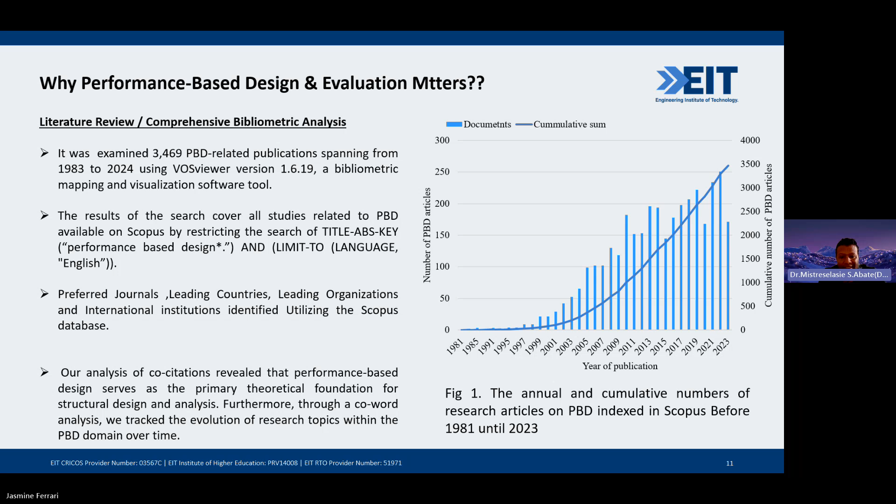In this research, the awareness of performance-based design is increasing, and we try to see which journal was publishing more in the PBD approach. Engineering Structures, and country-wise, the United States was the leading publisher. Co-occurrence and keyword analysis results were also checked, and the keyword 'performance-based design' was used most frequently.

So mostly in the literature review, we saw that in the context of seismic hazard assessment, engineering design, and comprehensive understanding of local geological and geophysical factors is very essential. Previous studies also lack crucial components such as local soil condition, ground response analysis, topography influence, active fault characteristics like slip rates, groundwater behavior, and slope consideration.

To ensure the accuracy of the seismic hazard map of a country for safe, cost-effective design of engineering structures in an urban area, detailed analysis is required. So the problem is because of lack of these elements, most countries' seismic hazard maps are not accurate.

So in general, from the literature review, there is one hypothesis—or not exactly a hypothesis, but an idea—about the challenge of adopting a seismic design code without necessary adjustment, accompanied by the absence of a reliable seismic map in a country without earthquake recording stations, which may lead to structural failure.

In such context, performance-based design emerges as a viable and crucial solution for ensuring structural integrity and safety for existing and newly constructed structures.

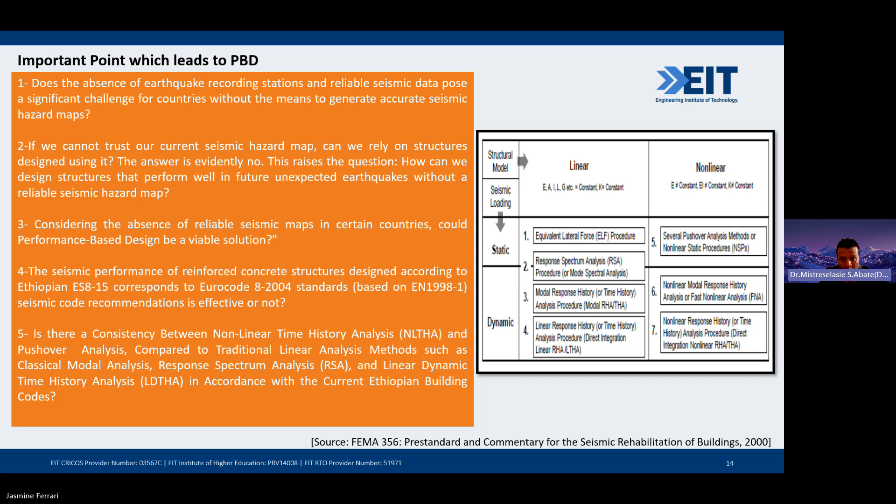Then after you compare, if for example the comparison of cross-section and area of reinforcement is equal, no problem, no need to go to the next step. But if it's not, then you have to go to the next step.

Then what we are going to do is design our response with the optimized nonlinear time history analysis result and pushover analysis. So we have to optimize the final local and global response found in the pushover and nonlinear time history analysis.

As I told you, from the PEER ground motion database we extracted 11 databases of past recorded earthquakes, for example Imperial Valley in the US, Landers in the US, Mammoth Lake. Imperial Valley happened in 1979, record station 164, magnitude 6.53, VS30 shear wave velocity 471, PGA value 0.1, and the mechanism was strike-slip, with spectral ordinate.

This was SRSS type. So as per the code, we need a minimum of 11 earthquakes for linear time history analysis, as well as nonlinear time history analysis and pushover analysis.

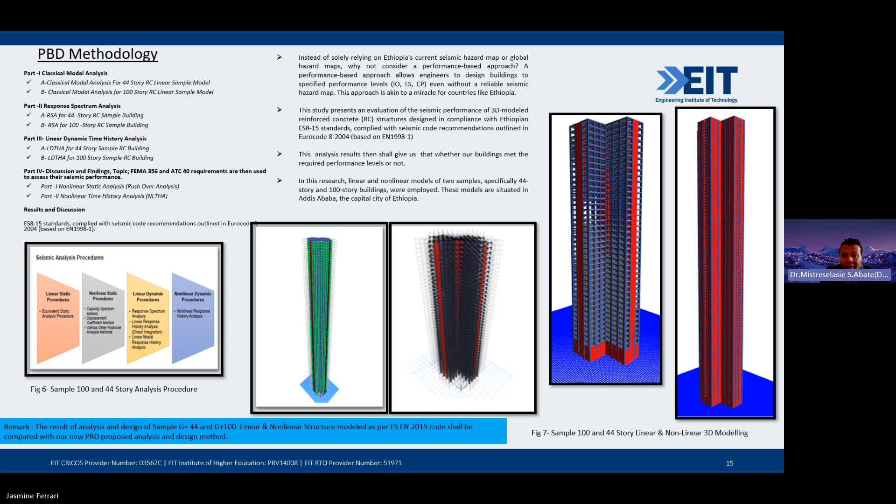So you have to do scaling and matching. For example, we can use two software tools: Seismomatch, and ETABS itself has the capability of matching your target response spectrum with the ground acceleration.

So you have to take care when you download these earthquakes. You cannot simply download an earthquake. You have to check the type of earthquake, the fault type, whether it's pulse type or something else. There is a lot of criteria, because the earthquake you are downloading should match your site conditions, and you have to use a technique called deaggregation. This deaggregation information will give you which earthquake contributes more to your fault. So you have to check in that area.

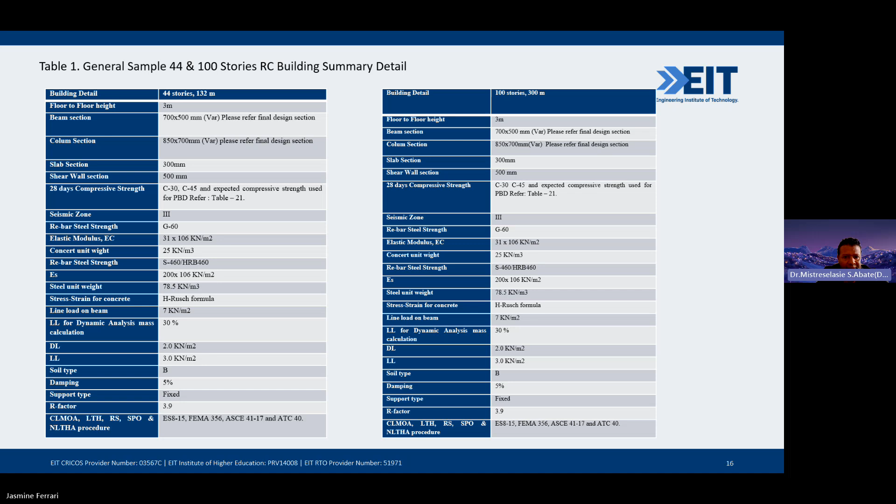Before the DBE level, we have the MCE level. So you cannot design at the MCE level. If you think your structure is like a linear analysis, it will be very costly. You cannot design with linear analysis.

So what the code recommends is that we take 2/3 of the MCE level, then we come to the DBE level, yeah? Then again at the DBE level, as you can see, we cannot design directly. So what the code recommends is we decrease from the DBE level to the design level using the R factor, as you can see.

This R factor accounts for ductility and the overstrength factor, because once you pass the yield point, the curve is not a straight line anymore. This increase is not because of ductility—it's also increasing because of the overstrength omega factor.

So as you can see, we use the omega factor again once we reduce the whole structure to its inelastic response using the R factor.

Then what we are doing is, for some building structures—for example girder beams and other elements—you want them to stay in the elastic range, yeah? So you have to increase them also using the omega factor, the overstrength factor.

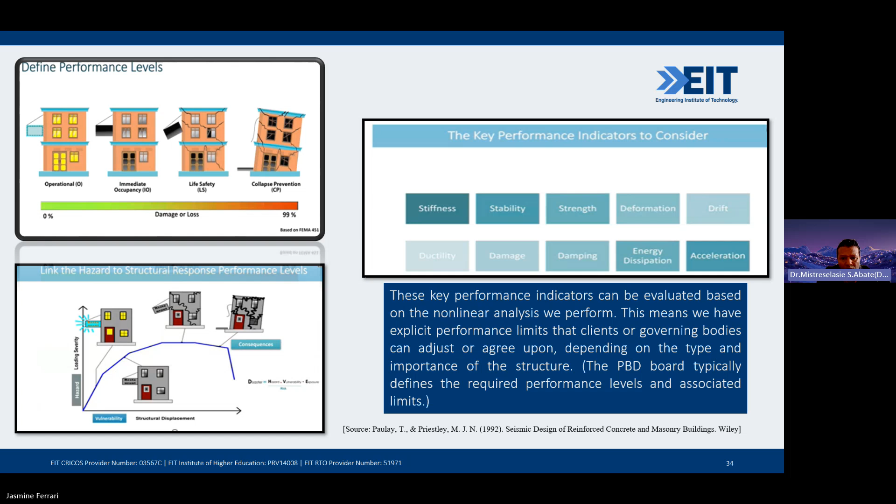So you have to first have a performance based design. You have to agree with the consultant, the client, and the PBD specialist on the acceptable performance indicators, and it should be within that limit. So this is the PBD and linear dynamic modeling background.

As we discussed, we have performance-based design on one end, and the building code on the other end. This is the advantage and disadvantage you can go through. For example, codes prescribe specific criteria and procedures that design and construction must conform to, but engineers do not actually evaluate the ability of the structure to perform as intended. PBD overcomes this shortcoming of building codes for seismic design, where performance objectives are considered implicitly and guarantee a safer building with better reliability through explicit evaluation of structural performance under different levels of earthquakes.

So these are some of the advantages of performance-based design: substantiating equivalence to specific prescribed code requirements, use of seismic force resisting systems, innovative design not prescribed by code, and cost-effective designs. Each level has its own requirement.

Okay, now we are on page 34. As you can see, we have operational level, immediate occupancy, life safety, and collapse prevention. For example, what do you expect in the operational level?

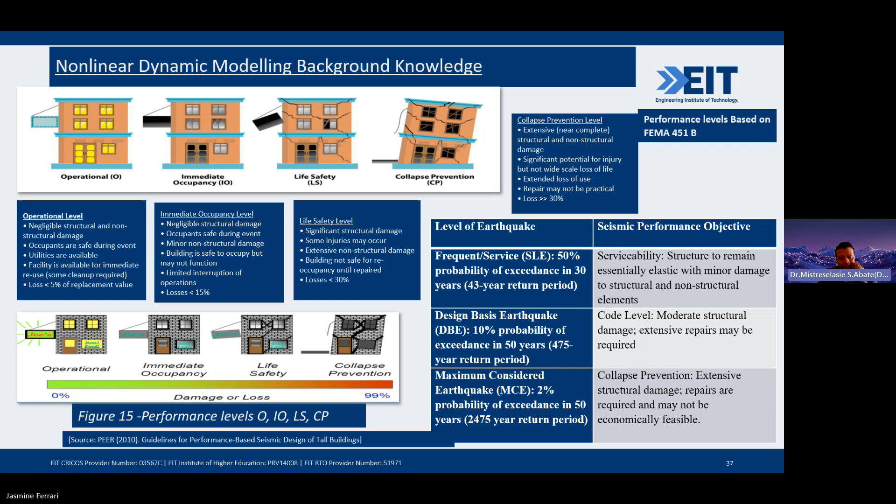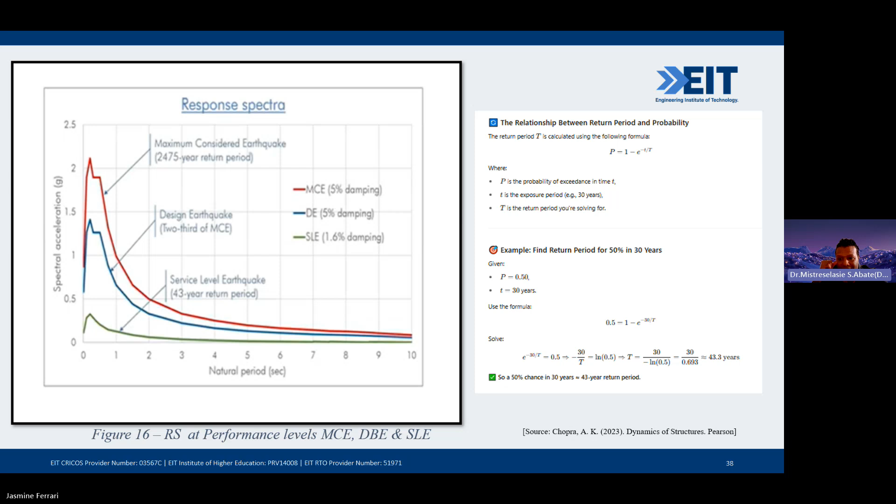We have a lot of different limits, I will show you, especially ASCE 41-17 limits. I will show you the standard. It will give you all the acceptance criteria for each MCE level and DBE level.

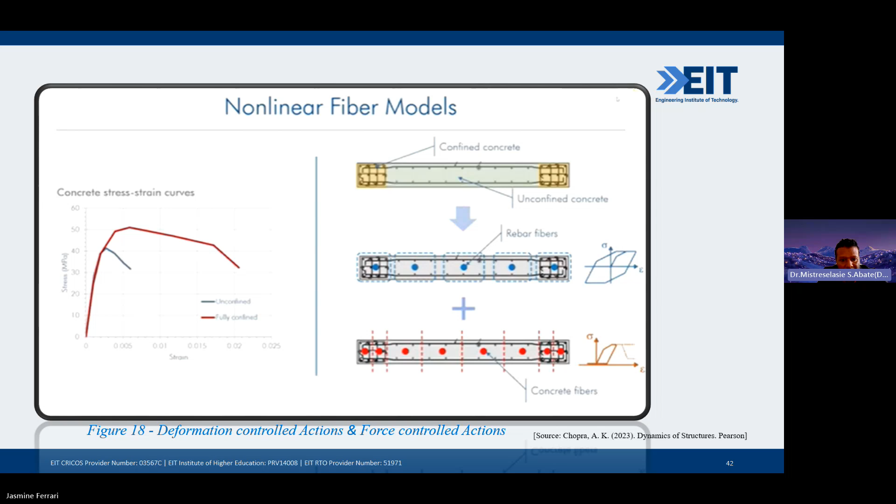I am on page 45. So the most important guideline, ASCE 41-17 modeling parameter and numerical acceptance. It will give you...

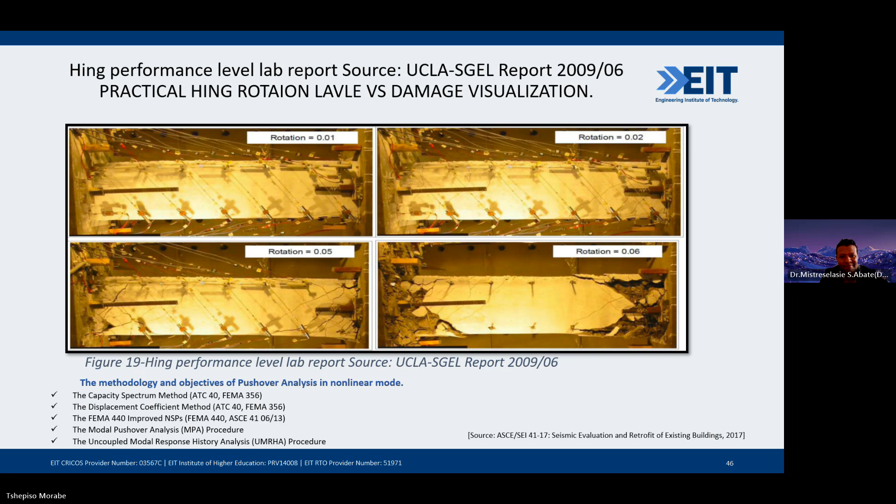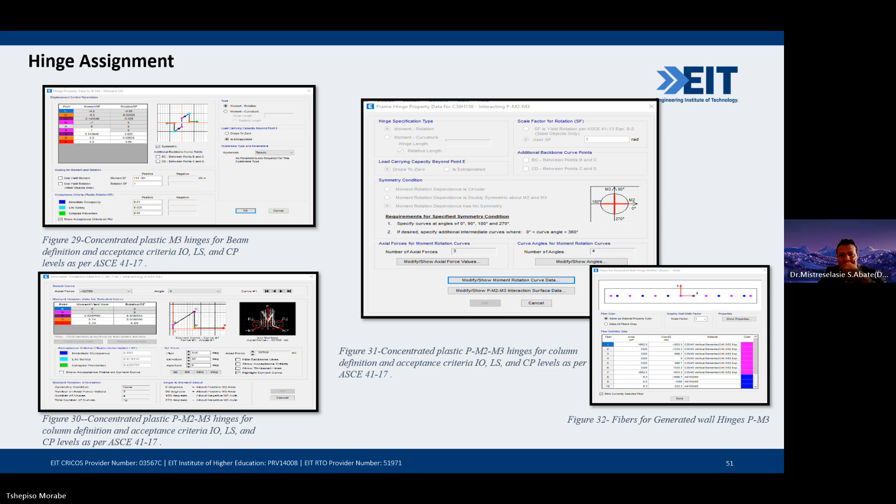Sorry to interrupt again, I'm just wondering what slide you're on. Slide 53. Okay, I'm just going to ask everyone else to put in the chat what slide they're on at the moment. Someone says 46. It's unfortunate. Sorry, guys. They're on 46, I'm on 53 now. It's still appearing as 46. Okay, it's just changed. I've just taken control. I think it would be better if you take control and Dr. Abate will just tell you to move through as he continues with the presentation. Yeah, absolutely. Thank you. Just bear with me one moment. Okay, so 40 — what number was that again? Sorry. 56, something like that, 53. 53, yeah, okay. Beautiful, thank you. 53, now I am in. Okay, great, thank you guys. We really apologize for the inconvenience. Okay, so everybody can see now, 53. Great, okay, great, thank you so much.

So how PBD works, as I told you, it will start from the client and the architecture, structural engineer, then we have PBD specialist, then site-specific consultant, and PBD reviewers. So all these are working as PBD. So you cannot do it by yourself for proposing the acceptance criteria.

The client also should agree and so on. So we have to start with the client, okay? If the client asks what is the benefit of applying PBD, if he asks, any structural engineer following this presentation, if someone asks you, if you design my building and it fails, will you take responsibility? Now ask yourself, can you say okay, or will you say no, I am following the code, and if an earthquake comes and the building fails, it's not my responsibility. So as a structural engineer, we don't like that.

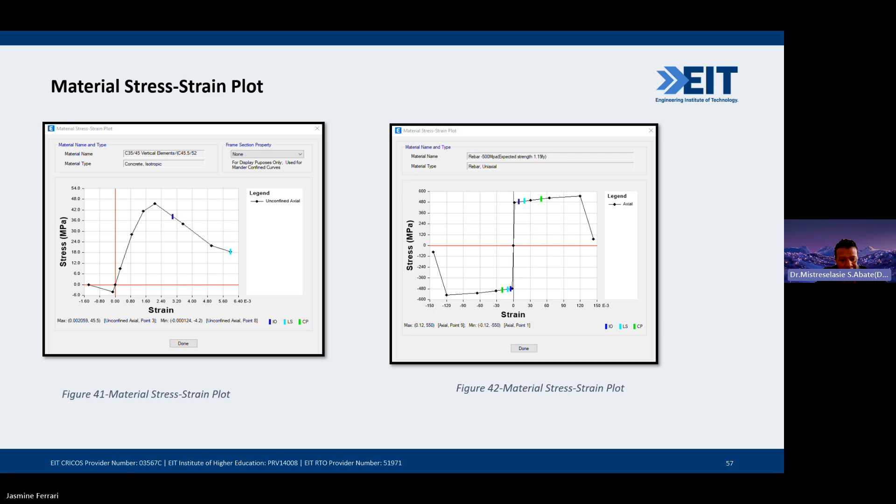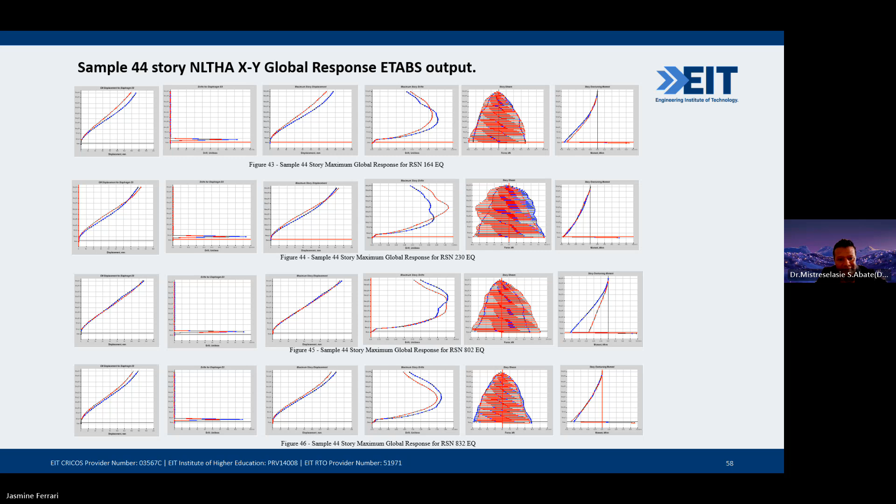Okay, so this one also shows the story and global responses, whether it is shear force, moment, story drift, story forces, and everything you will see like this. This is nonlinear time history result from ETABS. Okay great, so can we go to the next page please?

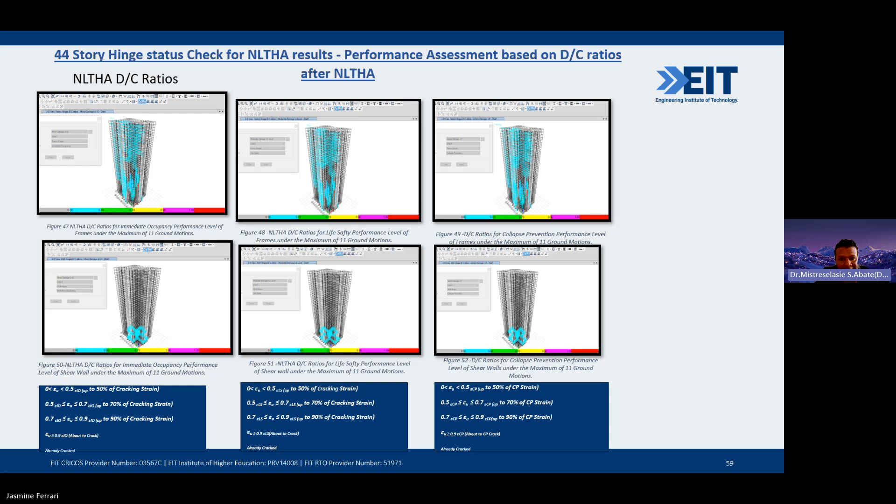Great, 60, okay this one also the same thing. The DC ratios for a 44-story building, and you will get a chance to see your building performance like this.

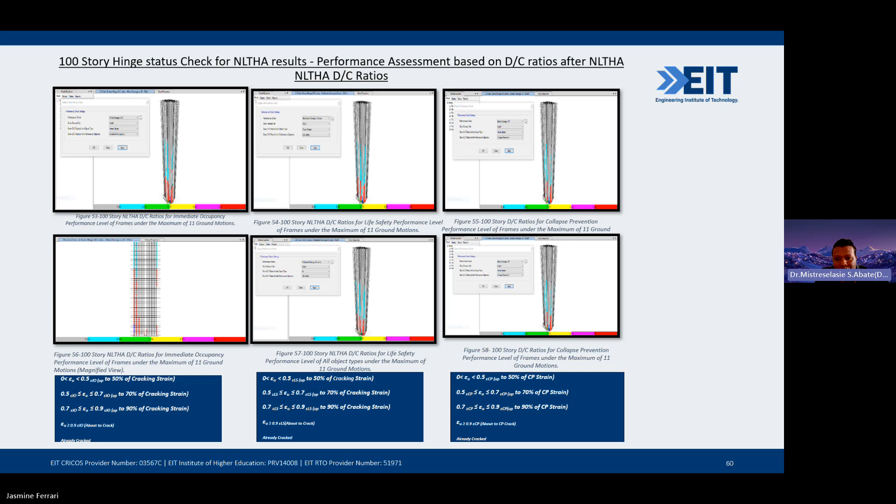Okay, this is the overall discussion on two linear analysis procedures, and we perform all linear dynamic time history analysis, response spectrum analysis, nonlinear time history analysis, and pushover analysis, and we get the result for 44 and 100 story buildings, this is sample results.

Shall I go to the next page please? Sorry, I'll show you a question in the Q&A section. Which section? The Q&A section. Yeah, every question we will answer in the Q&A section, okay? No problem.

So this presentation is just for your information, a general idea, but I will open the ETABS software and show you very quickly what I mean by performance-based design, okay? So shall we continue, Jasmine?

This is the result we get from the analysis. As you can see, we have linear time history analysis, response spectrum analysis, and pushover analysis. We compare the results in one graph, and we can see the nonlinear time history analysis is superior to the linear analysis. The optimization of our overall structure is done based on the nonlinear time history analysis and pushover analysis.

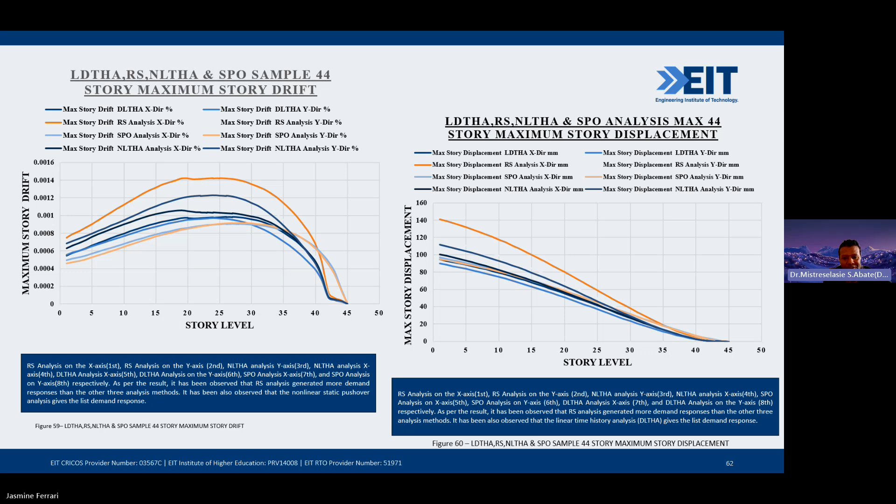So I think this is enough about the theoretical part. Jasmine, can I share my window now? Because I want to go directly to ETABS.

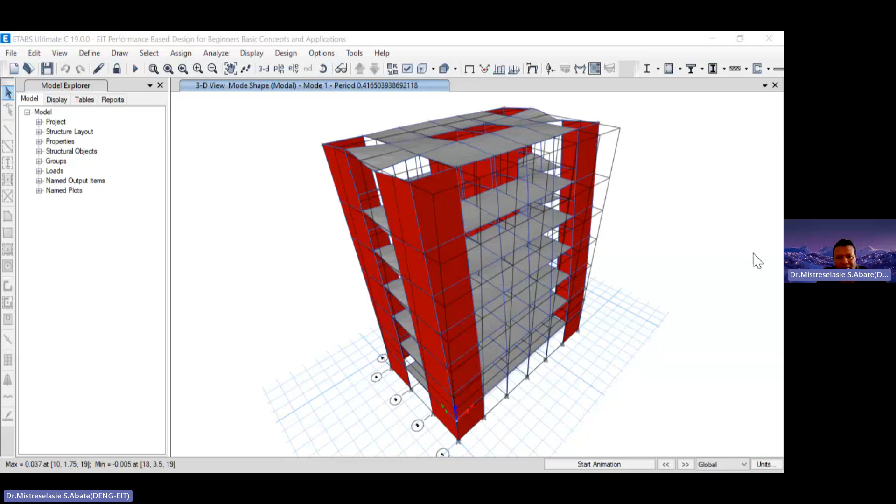Okay guys, so this is the software. First, because we don't have time now, let me show you - let's say this is your elastic modeling. Elastic modeling means you go to section definition, you can go to frame section and define your sections, okay, here like this. For example, if you want a beam, you just go there and put the beam section and everything - the depths, the widths, and something like that. So in this way, you have to design your elastic analysis.

In the elastic analysis, you define material properties and you define the section properties like frame section, slab section, wall section, and everything. This one, in our webinar, in the first webinar, we did it. I thought we have time and I'm going to show you, but let me go back.

For response spectrum, you go here and you have to define your response spectrum as per the code. Once you have your response spectrum, then you go to mass source - you go here and you have the mass source, whether specified load or you can go to element and give the mass source. Once you do this, then the load cases - as you can see, I give all the load cases. We have dead load, live load, and the equivalent lateral force procedure.

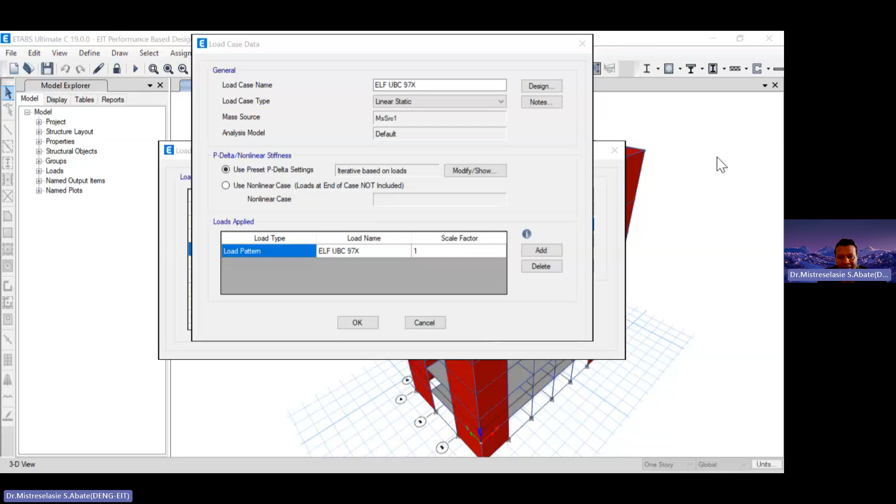As you can see, the linear static force procedure, I give load pattern - I gave load pattern, and we have in the X, in the Y, then we have response spectrum also, in the X and in the Y, and we have earthquake, and we have time history analysis. What I want to show you here is, in the time history analysis, you have to give U1 and U2, then you have to, of course, if you go here, define load cases.

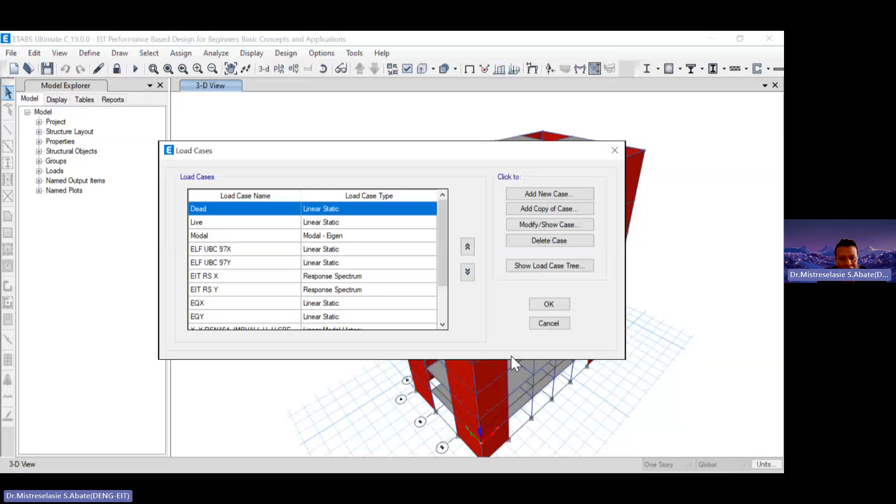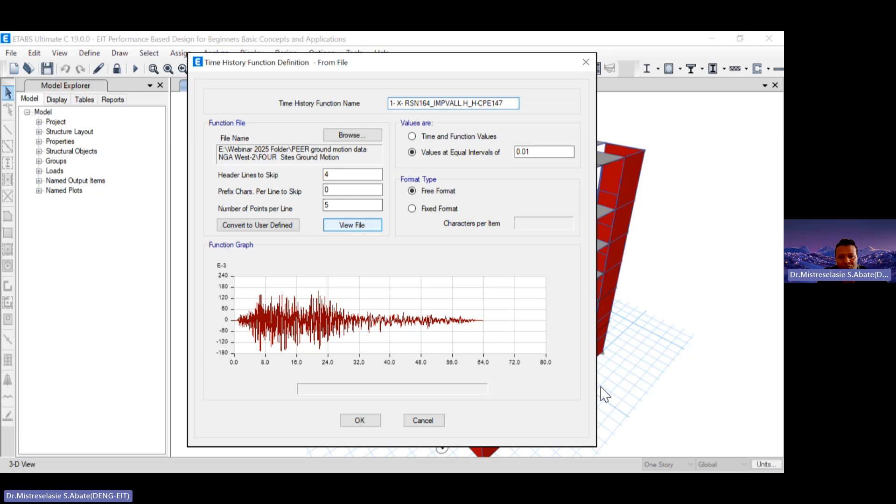Then you have to bring it into your software, and this is the time. Once you bring it here, if you want to view the earthquake data, which is extracted from the PEER website, you see, this is the earthquake data. This is PEER website database. It was in 1979.

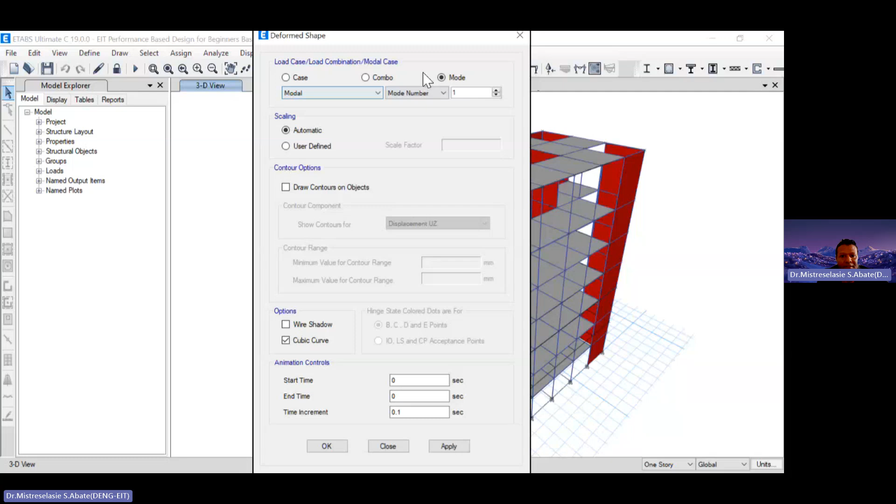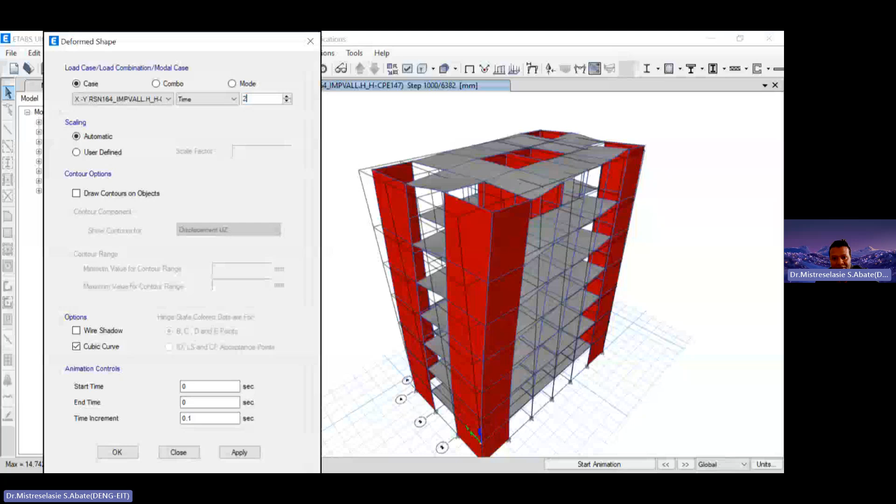If you go here to modal, or if you go to, for example, cases, for this case, if I go to 10 seconds of the earthquake, then if I check it, it will give me the deformed shape at the 10 second of the earthquake. If you go to 20 second, it will give me the 20 second of the earthquake like this.

And what you can do is, because you need the 40, 50 second response, you have to go to here and create video. Create video and multi-step video, and it will give you something.

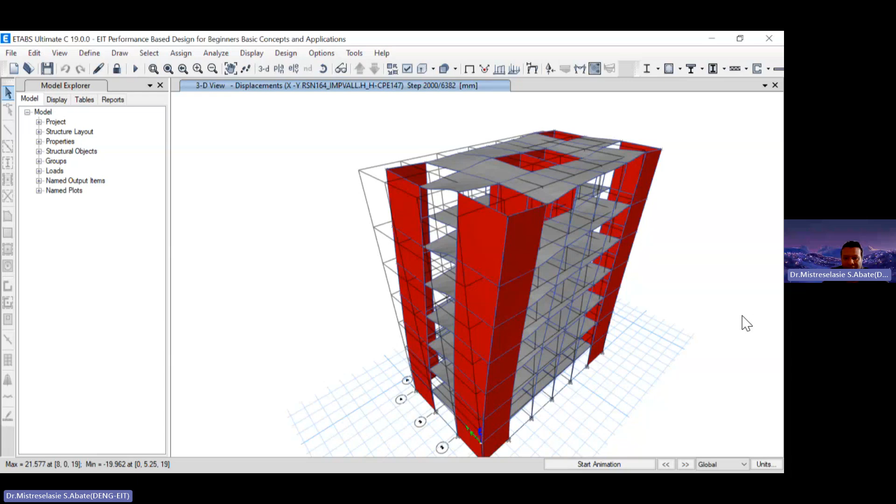Because sharing is very difficult now, I had a video, I recorded the video for you, and it will show you the moment, the shear force, everything change with minutes, even each second. So that is, you are now in the

linear analysis, okay? So you can check, for example, the moments like this. You can check the shear force. You can check everything you need here. For different parts, for example, for ELF, you can check the moment. And you can go to, for example, response spectrum in the X direction, and check the shear force.

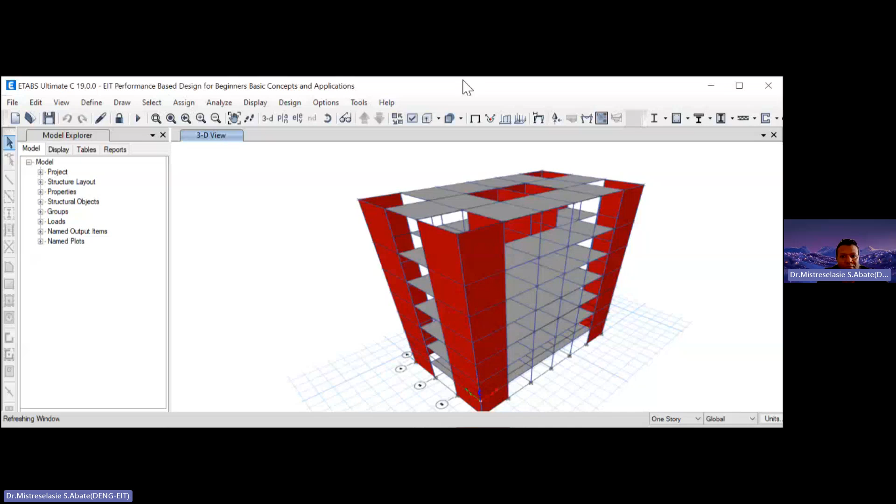So you are now in the elastic analysis. Once you are in the elastic analysis, what you do, you have to go to the design part. You have to go to design, steel design, then here, start the design, check of structure. Then you have to design your sections.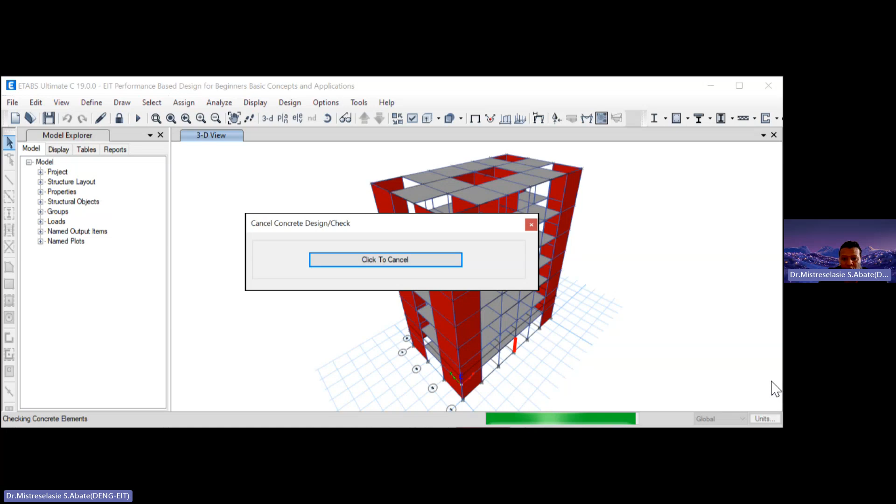You have to design your sections. Because why am I designing now? You will get the reinforcement detail. Before you go to nonlinear modeling, you have to know the section and the reinforcement of each shear wall, beam, and column. Then the program will use that as a capacity curve.

As you can see now, it's finished already, and most of the beams and columns are passed, but some of the columns, you see, fail. So what you have to do is go back again here, change the sections, and run again.

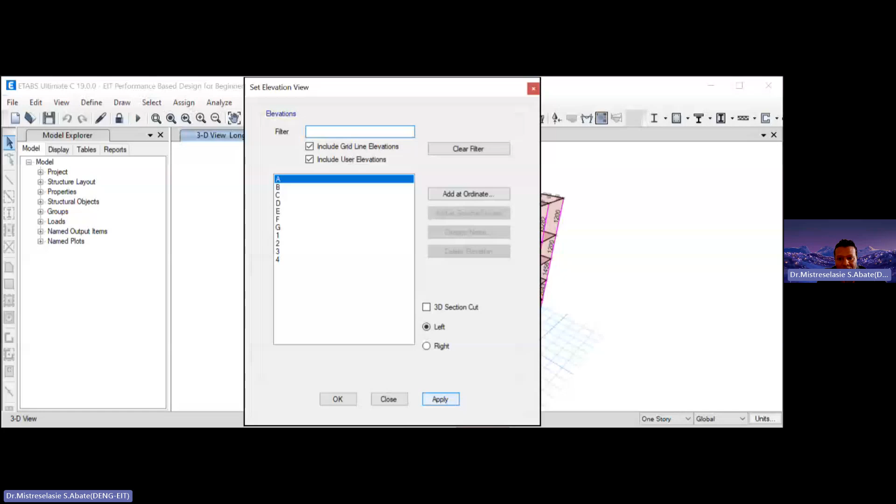But for example, if you go to the elevation side, just to show you, this is the area of steel. If you go here, it will give you the area of steel. Some of the sections are out of sections, and it will give you major reinforcement and minor reinforcement.

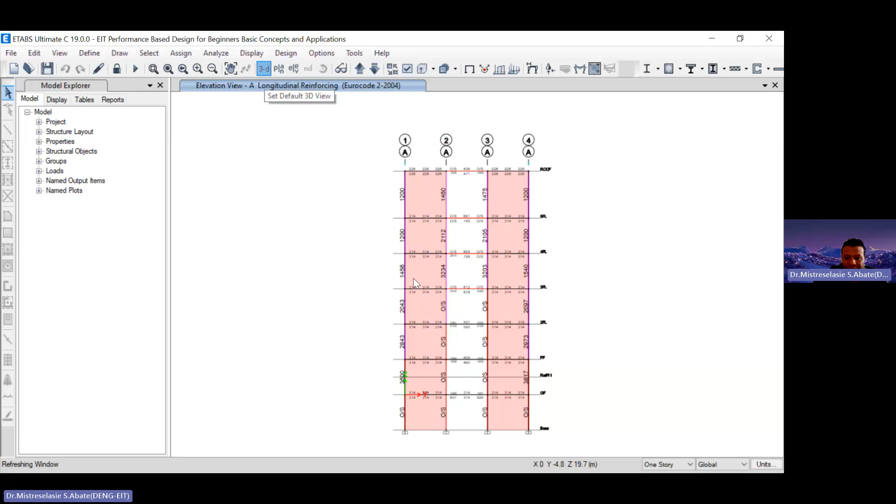This one, there, yeah, it's all there. Can you see that? Okay, they can see. Let me do it here. So what we can do now, just 5 minutes. Once you finish your linear analysis, now I can go. They can see, yes, the most important part is this one.

So what you do, once you finish your linear analysis here, you just go and unlock your result. Okay, unlock your result. Once you unlock your result now...

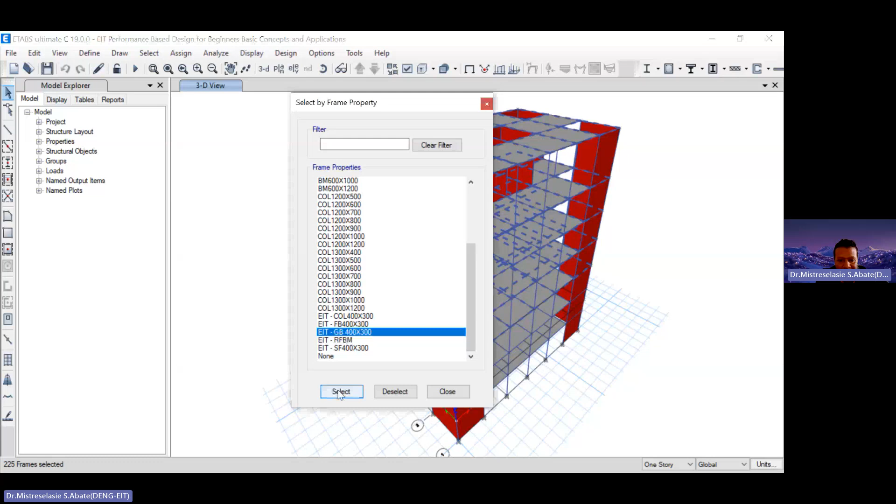For example, what you do: select, go to property, frame section. Let me select all the beams. We have this one, select, we have this one, select, we have this one, select, and we have this one, select. So all the beams are selected now.

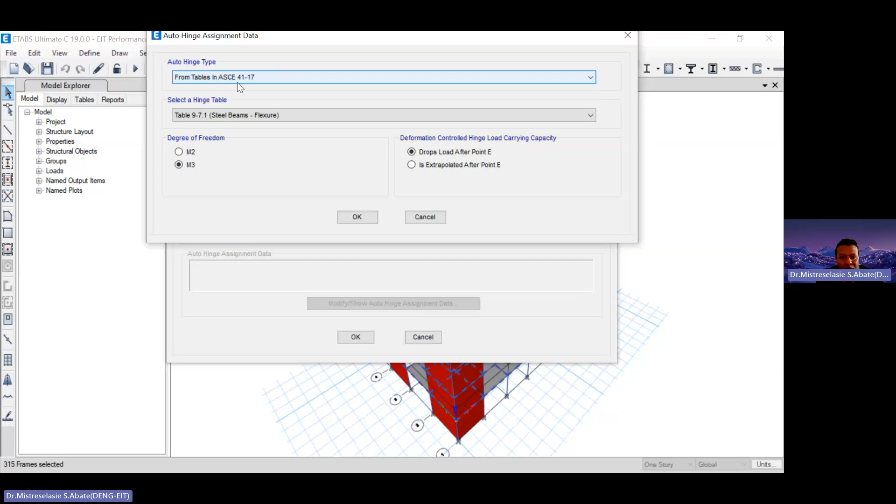So what you do, you go to assign frame hinges. You go to hinges, and this is auto. Let's assign, for example, 0.1, add. Now you see that all the ASCE 41 files will come. You choose 41-17, then beam flexure, then M3, and choose here the load. You're gonna choose, you see, reinforcement ratio from design and drop.

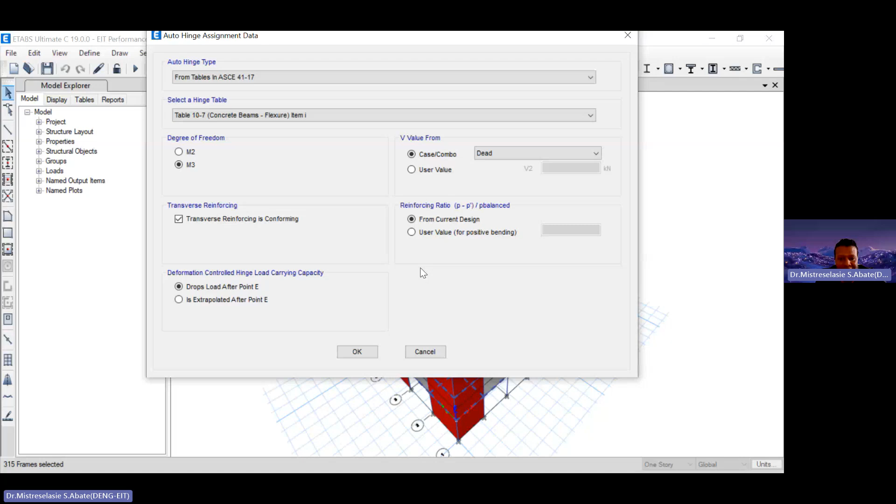Once you say okay, it will apply in one end, and on the other end of the beam again you will add, and the beam everything is the same, and you apply. When you say add, now you are changing your linear analysis into non-linear analysis. As you can see here, if I go here, the hinges are already added.

Again, I go here to the column. So what you can do: select, go to property, frame section, and go to the column side, just select column, and this is all the column. Then you go to assign, and you go to frame hinges.

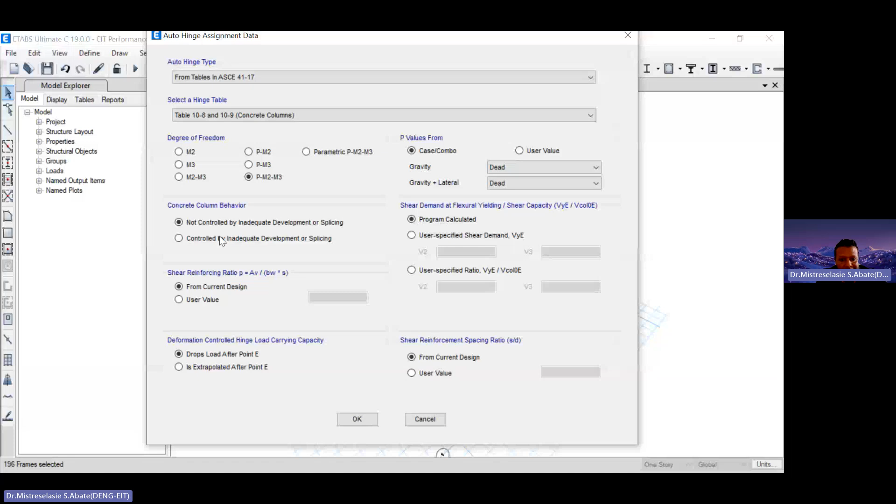Now we're gonna assign here 0.1, add. This time, instead of steel, you're gonna choose your column, concrete column, and the degree will be P-M2-M3, and everything else is the same. You go through here and say okay. Again, on the other end, 10%, just add, and you do the same thing. Then okay.

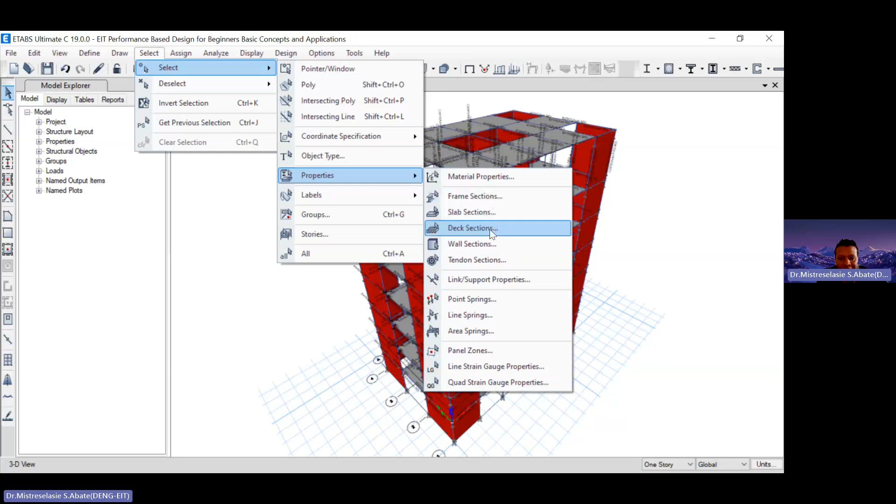Okay, everything is assigned in the column too. The last step is to go to select, and by frame section property choose this wall section, and select all the walls.

Now when you assign shell here, you need reinforcement from wall hinges, so you can say from design, okay, then apply. This is two-way application. Then go to select again.

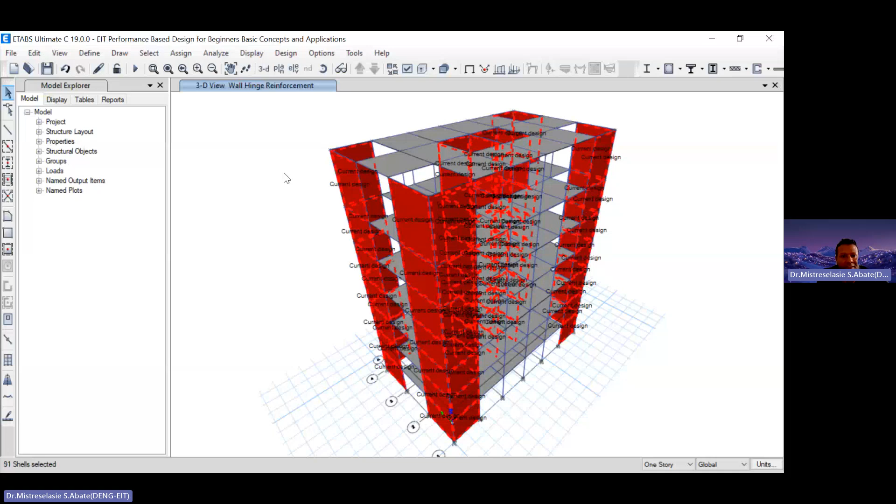Get previous selection. This is what you do: assign shell, and assign wall hinges. In the wall hinges, we're going to assign PM3, PM3, okay, that this is fiber hinge modeling.

Now you change all your linear analysis into nonlinear analysis, using plastic hinge modeling for column and beam, and fiber hinge modeling for shear wall. Once you change this, you go to define load cases. As you can see, load cases now only have linear analysis.

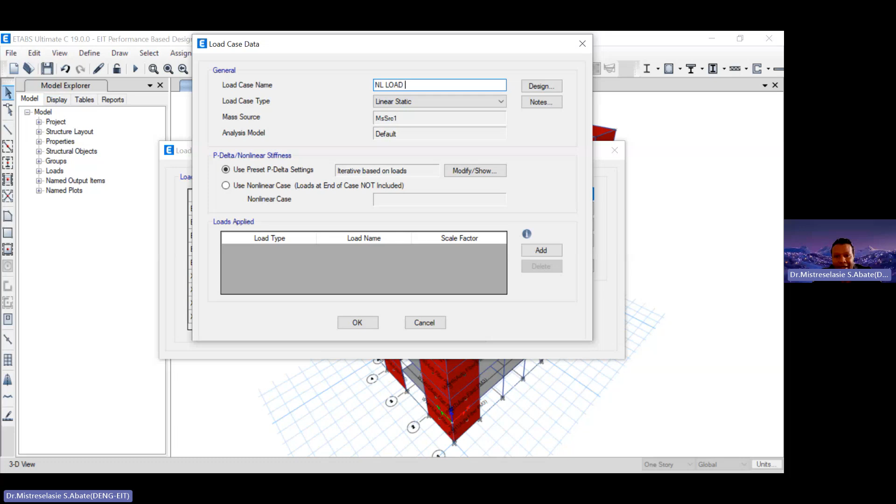So we have to change it into define load cases, then add new load cases. For example, this is nonlinear load case, nonlinear, like this. And you have to say here nonlinear, this time history, and from time history you choose nonlinear response history.

You can start from 0, but you have to add nonlinear there. For now I will start from here, and you have to change acceleration to U1. Then choose the type of earthquake you will use, and use the scale factor here, 9810.

Like this. All this will get from modal, and you have to see 0.05 damping, and the nonlinear parameters are already from there. Then you say okay.

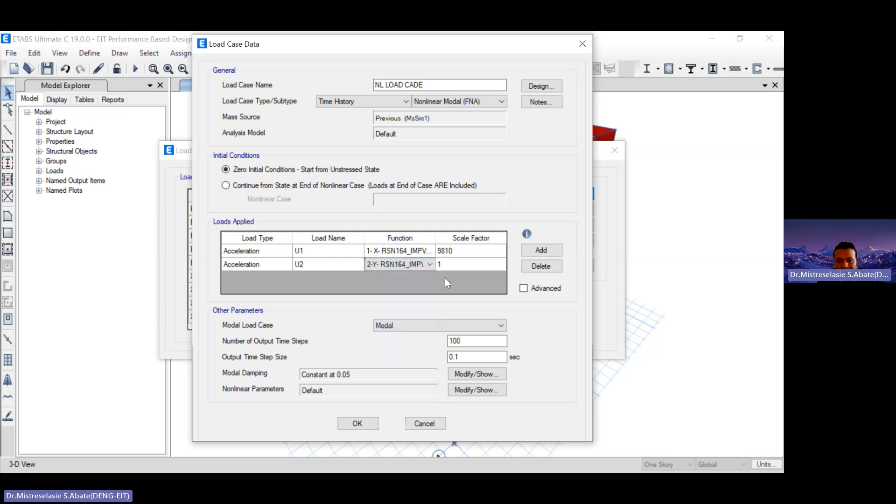But you have to also add, in the y direction, acceleration U2, and you have to go there and use 2 also, and put the scale here.

Once you do this, say okay, now you have a nonlinear load case. If I go to analyze, set load case, let's run only this nonlinear dynamic analysis. This do not run, this do not run, all this we don't have to run.

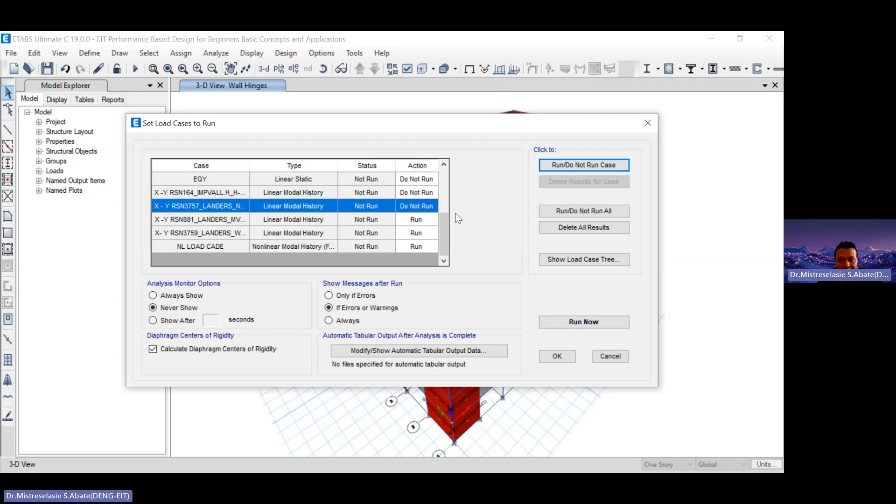Like this, all should not run here. The only thing I want to run is nonlinear. Once you do this, just say run.

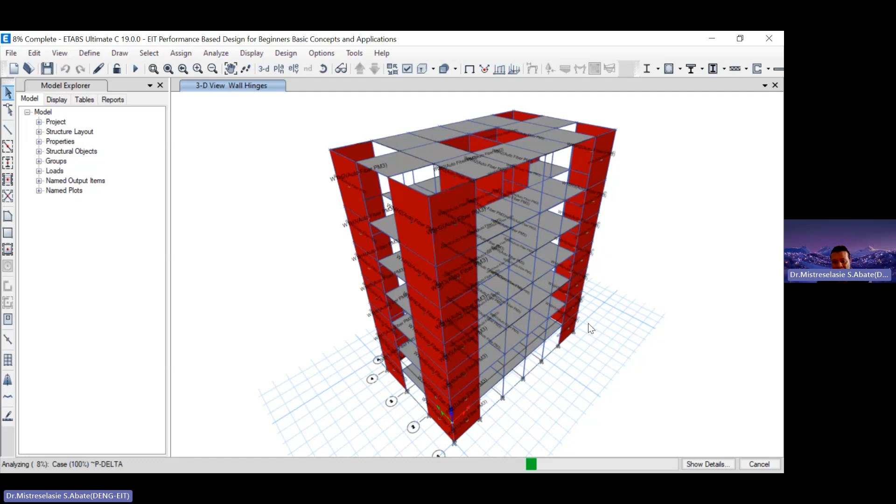Now your structure has the capability to check nonlinearity, because you assigned the force deformation curve from your linear analysis. Then you change your linear model into a nonlinear model and give the capacity curve. Once you give the capacity curve, you load your load case and run your building.

Okay, now after the analysis, it will give us the capacity for each hinge, will give us the limit. Each hinge will capture the capacity of the building. So it's already done, now 87 and 88.

Basically, performance-based design is very deep knowledge. We cannot finish it in one hour. We need one day even, to go through the basics of each concept.

But what I'm doing in this webinar is to give you a general overview: what is performance-based analysis, how to change the model from linear to nonlinear, what is force deformation curve, what is plastic hinge modeling, what is fiber hinge modeling, and how to define loaders and things like that.

At the end of this webinar, you may not be a specialist in PBD, but at least you know the idea behind it, and at least you know that code-based design is not the adequate way of designing a building, but performance-based is the most advanced, and it will give you every information about your building.

There were a lot of things I was recording, even linear models. I want to show you everything, but this one is also completed. So once the analysis is done, as you can see, now the analysis is done.

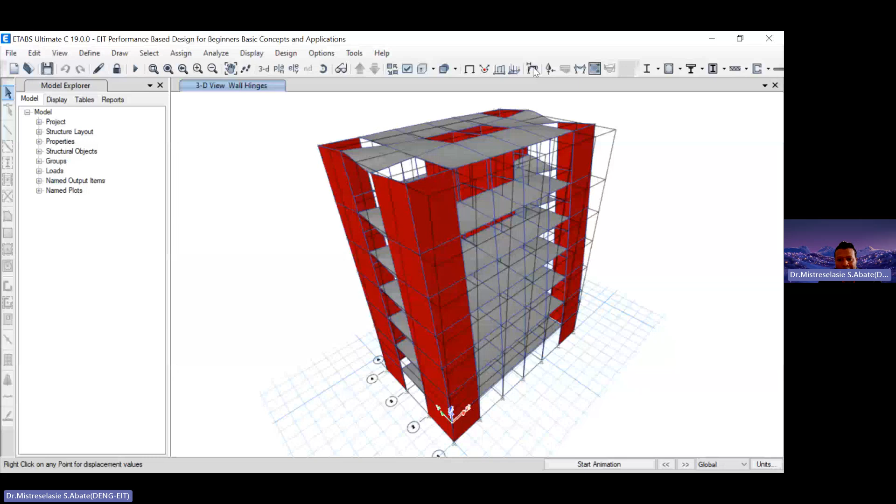So what I'm going to do now, I will go here, okay, it's done already, so I will go to deformed shape. For example, let me go to load case, this is the only thing.

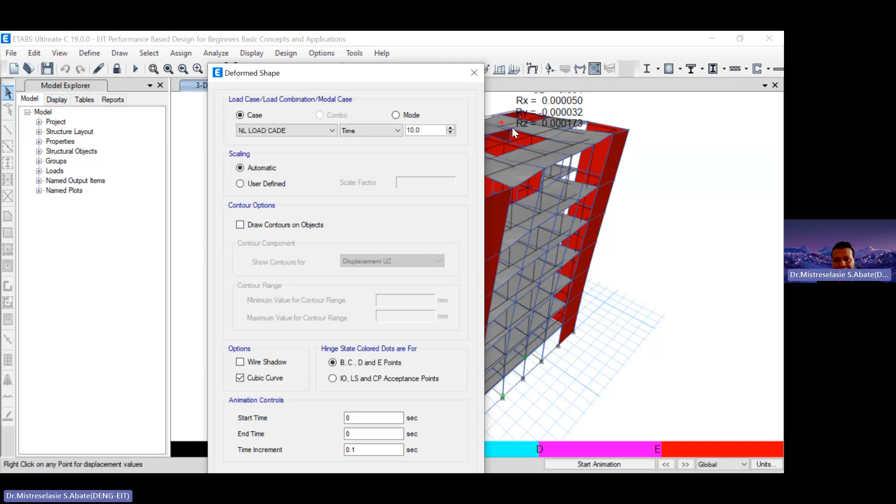So now each time, for example at 1 second, let me go to 10 seconds. At the 10th second, what is the response of the building? You see, at the 10th second, some hinges are here.

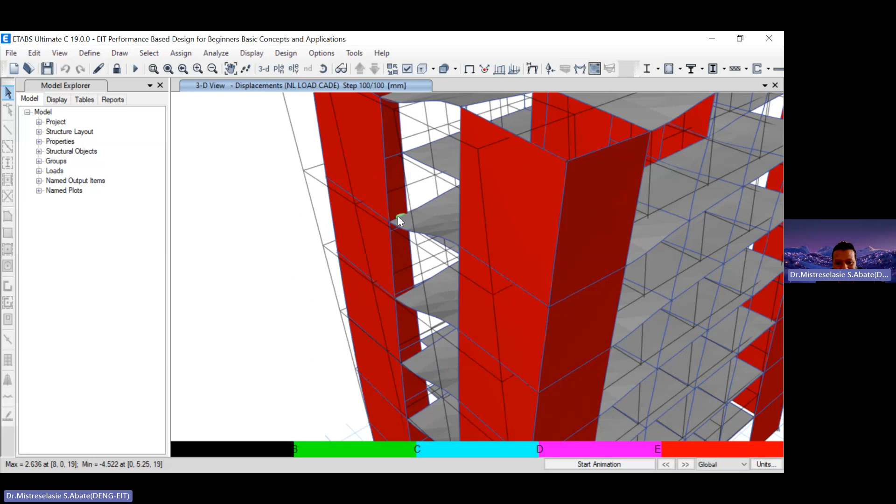Just one minute, guys, one minute. Let me remove this shear wall, I want to show you. You see hinges, some hinges are already at the 10th second, some hinges are already here.

If I go to, for example, 20 seconds, sorry, if I go to 20 seconds, for example, apply.

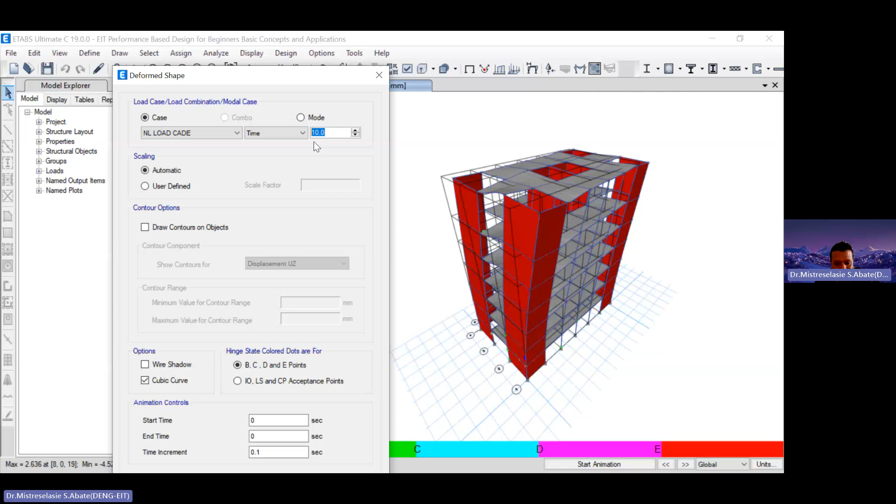You see, at the 20 second, some hinges are already formed. Maybe we have until 10. Okay, we have until 10 seconds.

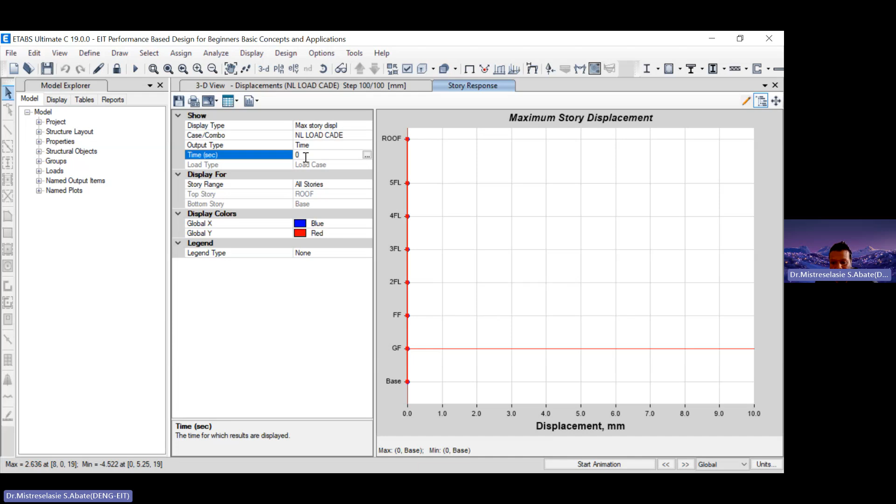So this is what we can see, and you can display, and you can go to, for example, story plots. You can see, for load type, or this is load case for us. So what I want to see is everything, like displacement. I want to see this diaphragm. I want to see story moment. But this one, the time I have to choose, because the output is at the time, and I want to see at the 10, the end of 10 second, okay?

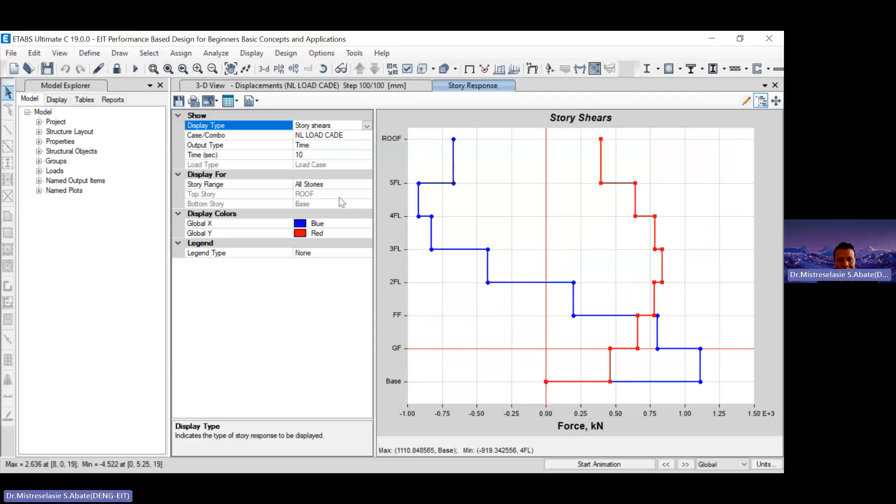So you see the reaction is coming. So everything, maximum story drift, and shear also, and moment also, and story stiffness also, okay? So in this way, you can check everything.

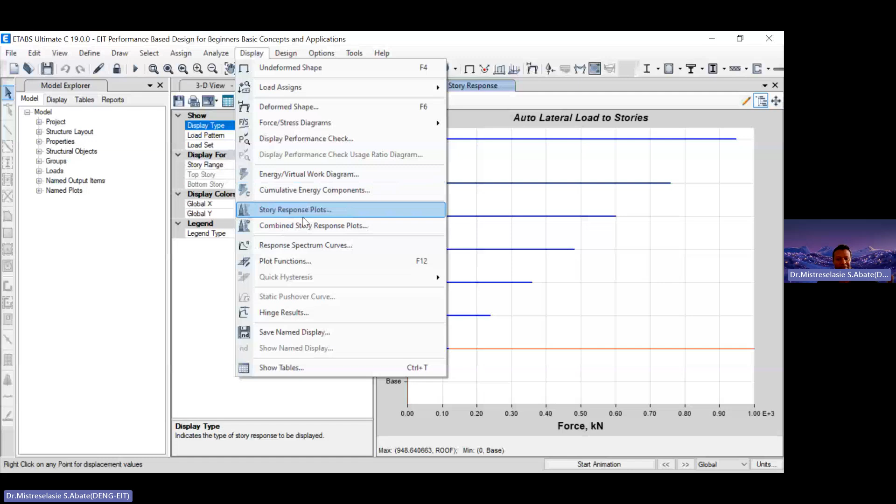And if you want to also display the combined, you can go here, and it will give you the combined responses, okay? Displacement, drift, shear, and overturning. And you can choose here, from this load and the step, like 10. You can choose the step, okay? And it will animate also. If you want to animate, then it will give you the animation, okay? You see? It will animate, and it will give you the responses.

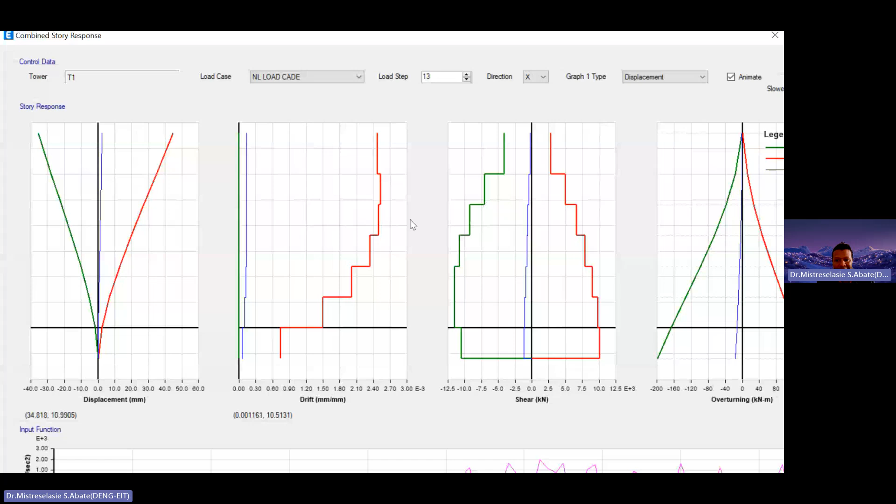So in this way, you can check, but the most important thing is we change our structure from linear to nonlinear, and now your building has a capability, okay? Your building has a capability to check the hinges, okay? This hinge override. So if you go, now your building has a capability to check.

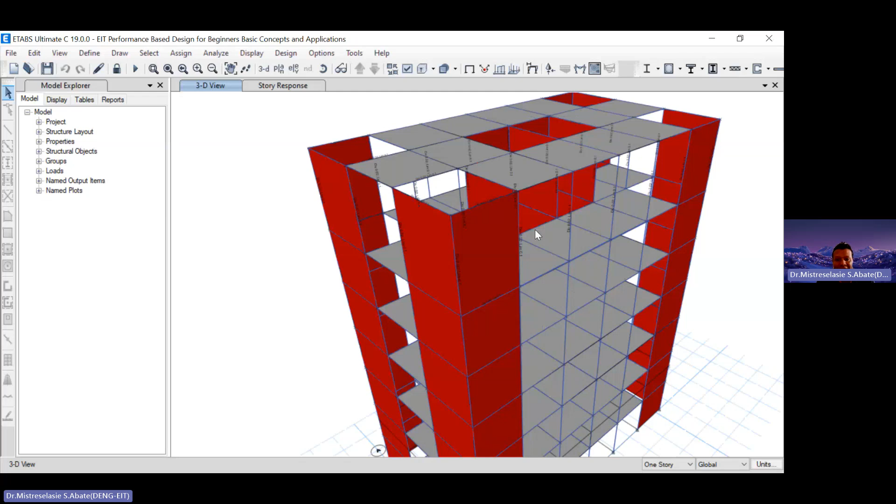And one thing I want to show you, just go to define, and as you can see, material section, if you go to here, everything what the hinges which are created will come here. So everything we generate for beam, column, everything is here. So if you go here, and if you modify, as you can see, all the moment curves and the IO, LS, and CP curves will be given here from ASCE curves, okay?

And you can see this is 1, because what you do is the material starts from the yielding moment, okay? It will not start from zero. They have MY, okay? This MY, the yielding moment, will be divided by the actual applied demand moment, and it will become 1. So the software doesn't need to know the elastic responses, okay? It will start from the nonlinear MY yielding point, and it will go like that. So this is a force deformation curve, with the hysteresis and everything.

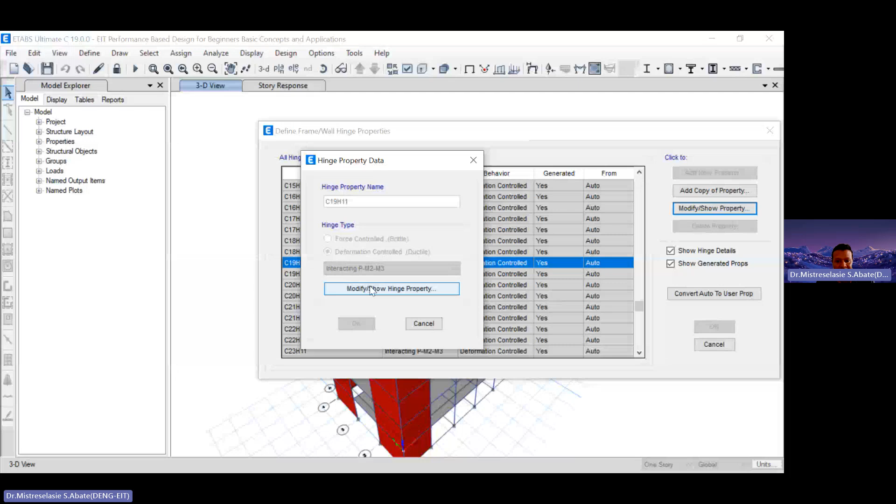If you go to this, this is for the beam, and if you go for the column, these are the hinges created for the column. So as you can see, this is what I told you. P-M2-M3 curves will be here a lot, because depending on the actual force and the plane you are in, for example, if I go here, it will go. You see, in the column, there are a lot of planes. The force at P, M2, and M3 will apply. So depending on the PM, M2 axial force, it will generate the moment rotation curve of your column.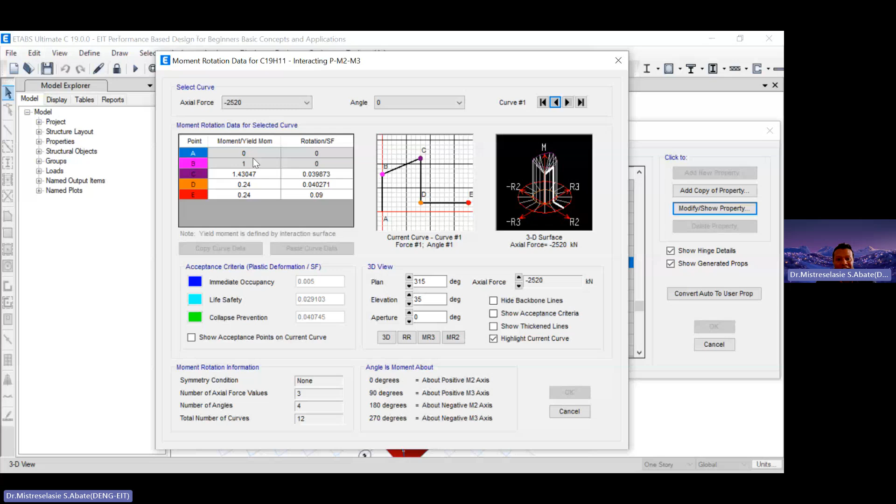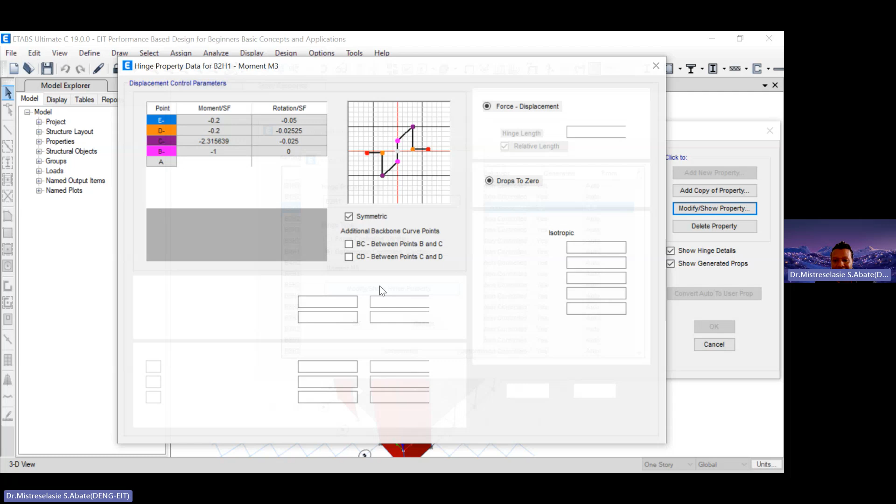So in this way, you can go ahead and check. But one thing I want to show you for your information, if you go here, the hysteresis type is isotropic, okay? But for column, for concrete, we have another type. So if you want to have, if you assign your structure as automatic, you don't have the chance to change it. So what you can do is go here and convert it to user defined. You see, now it is user defined. So if it is user defined, now if I go here, I have a chance to change it from isotropic, kinematic, Takeda model, pivot, and everything. So I can change it to the Takeda model because Takeda is very good for concrete types.

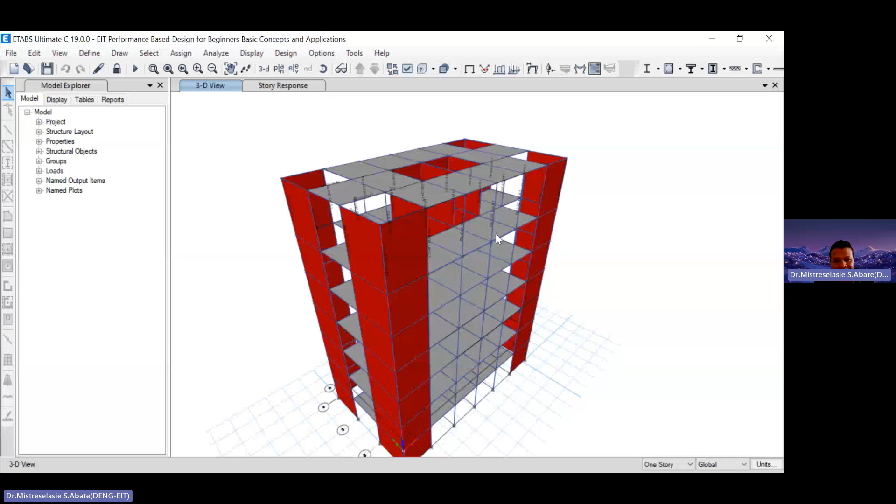Yasmin, can you hear me? Yes, thank you so much. Just bear with me one moment whilst I share the slides. So which slide are you up to now? Or are you finished? Wait, it's coming. It's coming. Thank you for joining.

We will, yeah, this in the first page. I'm just wondering because I know you got up to here. So have you discussed all of this? Yes, the other one is results.

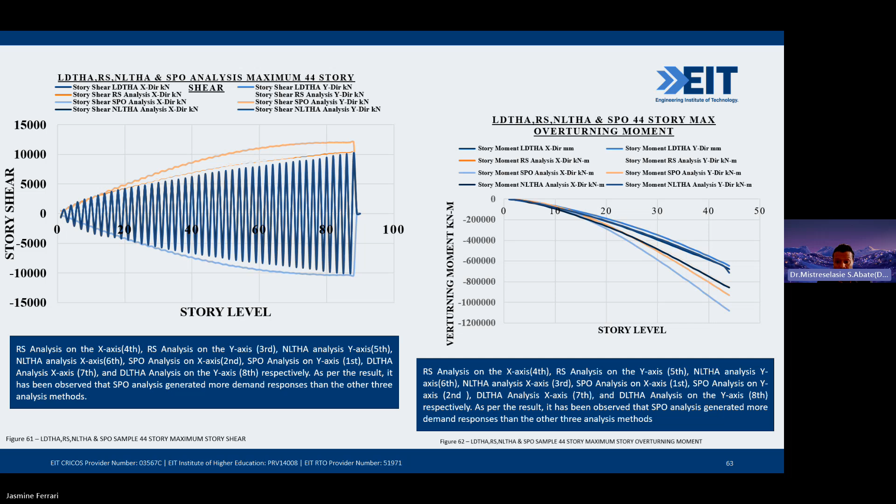No need, all of them are just results which we get from our analysis, just for the participants to see what result they expect from the performance-based analysis, because we have almost all analysis types: response spectrum analysis, linear time history analysis, nonlinear time history analysis, pushover analysis, and nonlinear response history analysis. So this webinar gives you almost everything. And once you do your analysis through all these things, then you are good to go, okay?

In the first page, we give you already 4 papers we published in EIT. These papers will show you the detail about what is performance-based design, the results, everything. So you can go through them. I hope you get some idea about performance-based design, as much as I can. I try to show you despite some problems.